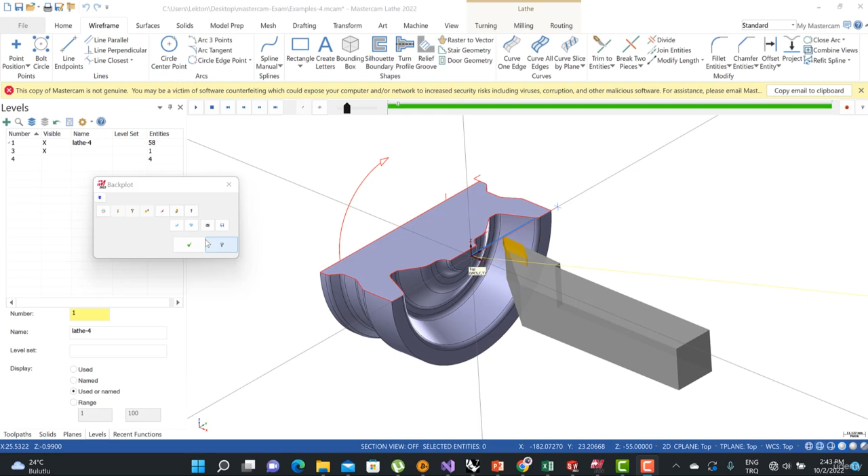In CNC lathe programming, we also need to be careful about the chuck rotation. So when you click the parameters, and then double click the tool, we're going to see the setup tool options. When you click here, you're going to see the CW and CCW options.

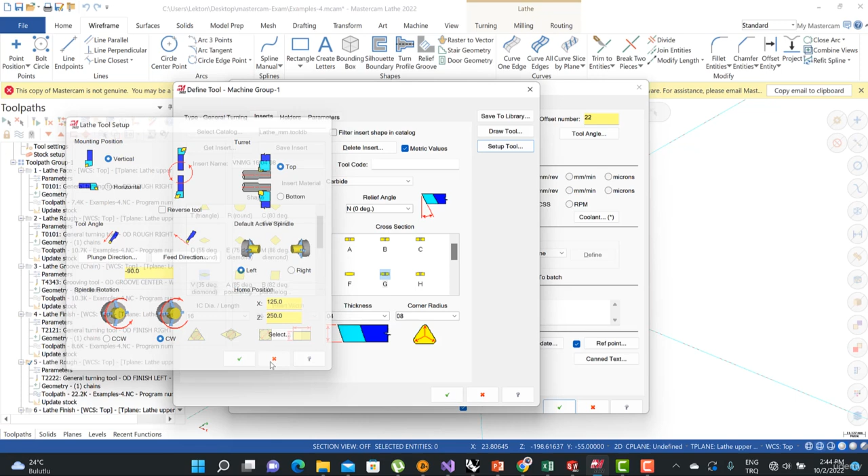This is M3 and M4. This is the normal version, M3. So if you turn to the CW option, we're going to see it here with a different color insert. So you can also use that to change your rotation. You can write -90 here. If you write it like this, this is going to be my rotation.

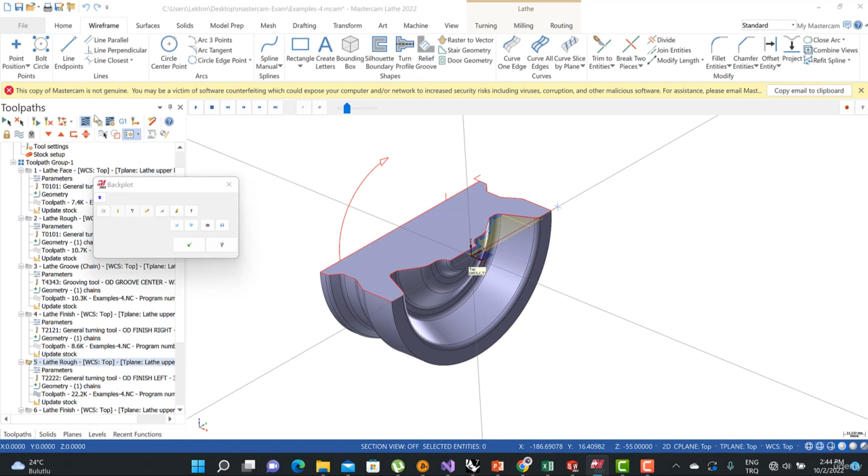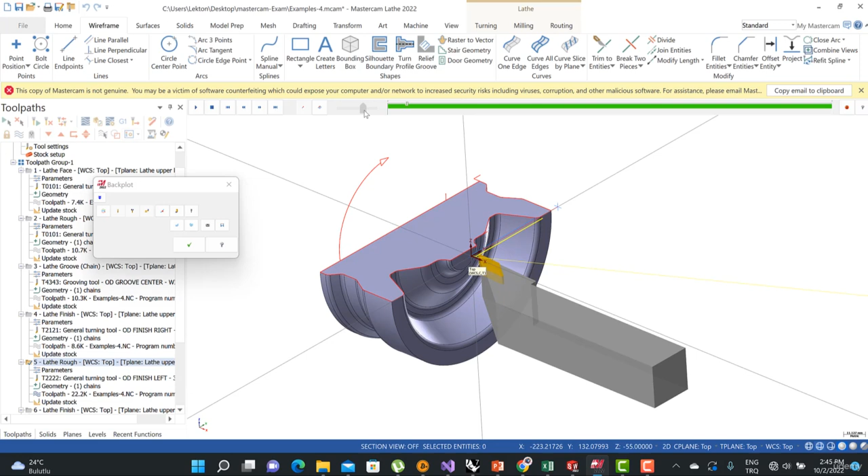So when you turn to simulation, we're going to see that kind of approach. This is the insert. You can see that the insert is looking to the top, at the ceiling. So when I use it here, we can easily create that kind of toolpath. Oops, sorry. So that part is quite important.

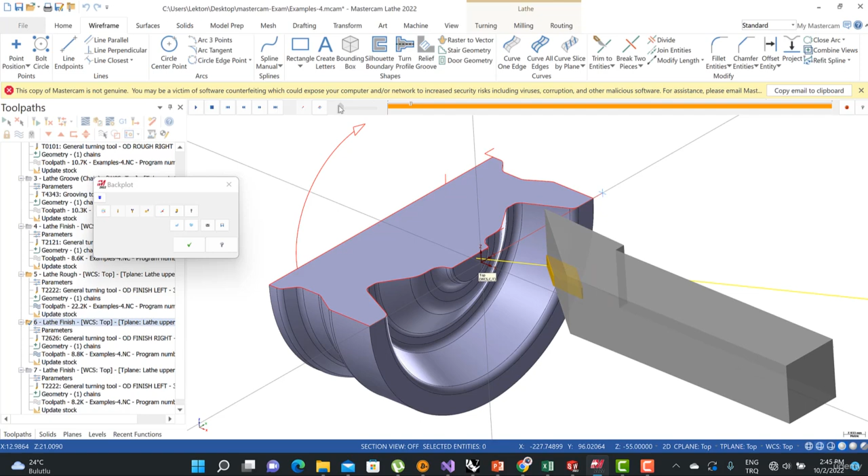So when you use that kind of toolpath, we can also turn here to this one, and let me check this one. This is the M3 option. When you use M3, you can also see that kind of solution. That's also possible. So we can also change that here. I can double click on it, click setup tool, and then I can change CCW to CW like this.

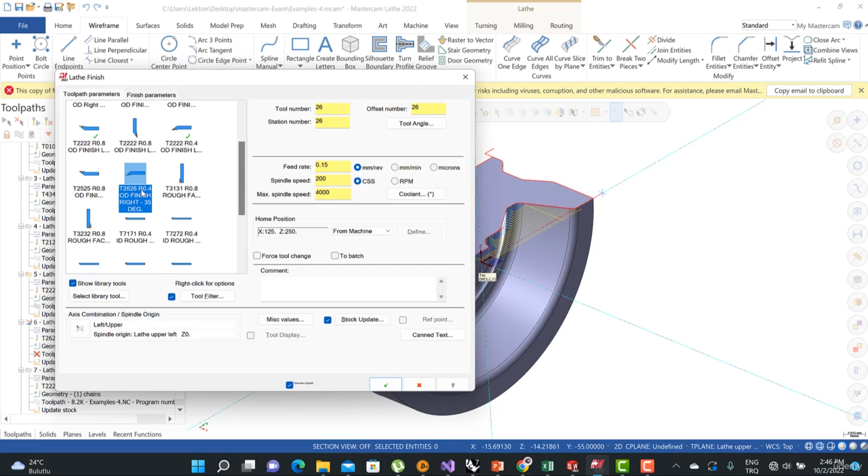But when you look here, that is not correct right now. This is not correct. Our insert is looking to the ceiling at that point, but we are looking on the left side. We need to look at the right side. So that's why I need to change my holder. You know that we can see the different holders here, for example, this one is looking on the left side, and this one is looking on the right side.

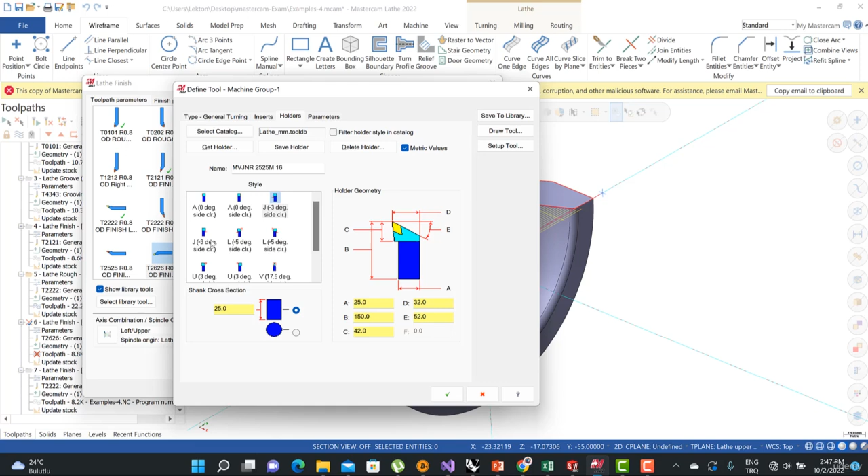When I double click on it, I need to turn to the holder. When I look at the holder, we're going to see that kind of approach here. This is the -3° holder, as you can see here, and we need to change that as well. Maybe it must be like this. Yes, correct. So I changed it like this, and then we're going to see that solution.

Of course, after that, don't forget to focus on your compensation direction; most of the time you also need to change that as well. Let me check the backplot simulation. Our insert is looking to the ceiling right now, and we're going to see that kind of solution. Let me turn back here. This is the reverse cutting, and we're going to see that kind of toolpath. That's also possible to use.

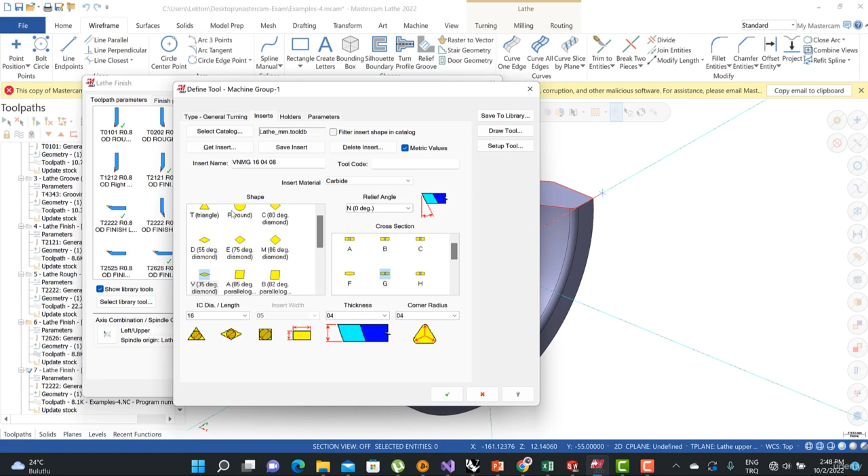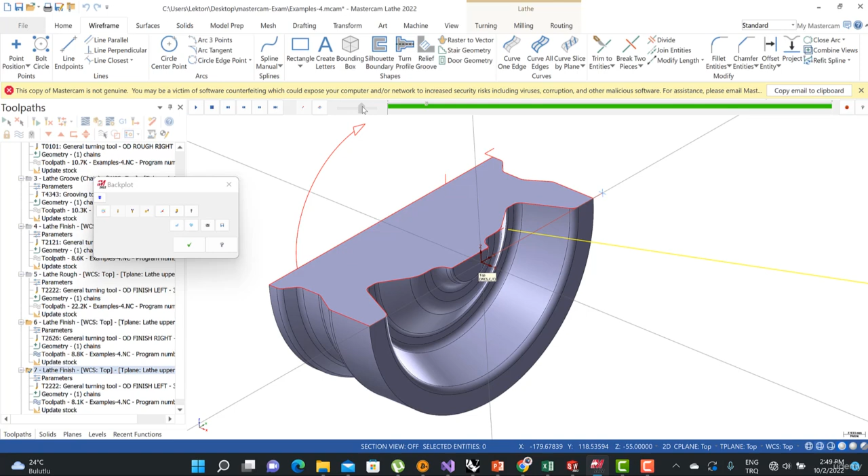At that point we need to use the CCW option. If we use CCW, yes, it's okay, because our tool is looking to the bottom side, so that's perfect. Let me check that here again. Yes, that's correct. And let me check here. This is also correct. And we can also see this one: the rotation is the reverse of that arrow, because we are looking at the bottom side like this. Perfect.

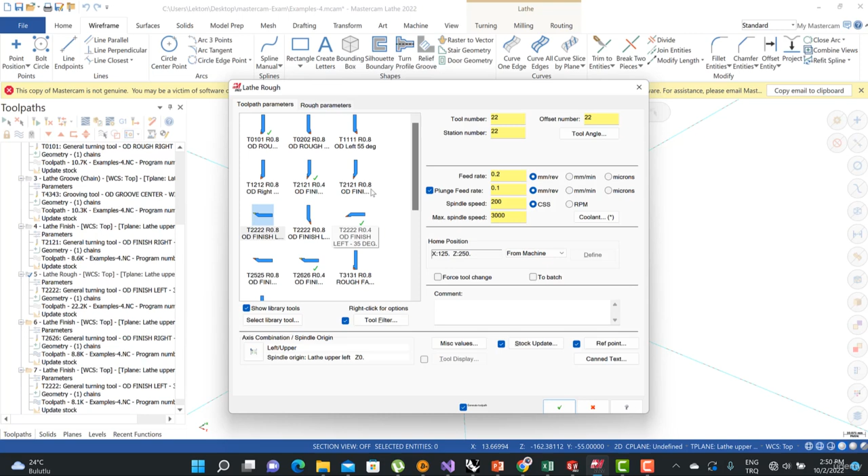And you can use that as well. You can see CW rotation and CCW rotation here like this. You can also change your degree as well. When I double click on it and open setup tool, you can change your degree.

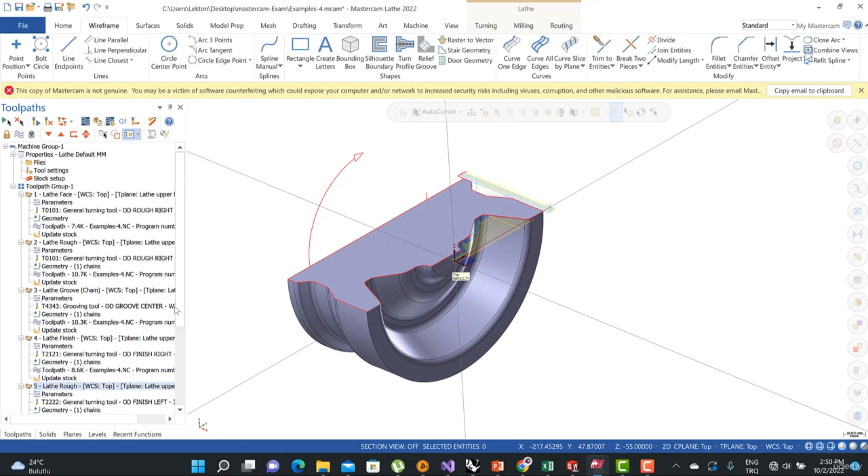This is going to help us with our tool setup. You can also see that example in our example 4.